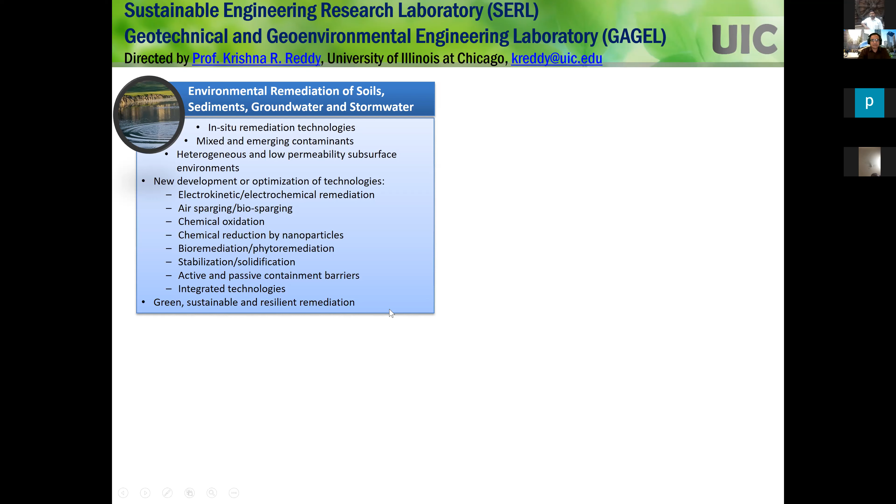And recently I've been working on green, sustainable, and resilient remediation. That's one of my major research areas. And the second research area is related to this short course: I work on waste management and landfill engineering.

So waste management deals with beneficial use of waste materials, even biological processes. And when you talk about landfills, as geotechs we contribute quite a bit, looking at the mechanical stability, contaminant transport, liner systems, and cover systems. And these days we are using a lot of biological concepts to make things sustainable, so we work on biocovers and bioreactor landfills.

So in this course, I'm giving brief lectures on broader topics. But if you are interested in knowing more about a lot of my research, then you can look into the papers that I have written.

The other area of research that I work on is called life cycle assessment and sustainable resilient engineering. Here we try to quantify the sustainability and then assess different sustainable materials and sustainable designs. This is really a very broad area that is applicable not only to geotechnical and geoenvironmental engineering, but any specialty in civil engineering, even chemical and mechanical engineering, or any branch of engineering. It's becoming very important these days to look at sustainability and resiliency — not just talking about it, but actually doing something and evaluating how well you are doing towards this sustainability and resiliency.

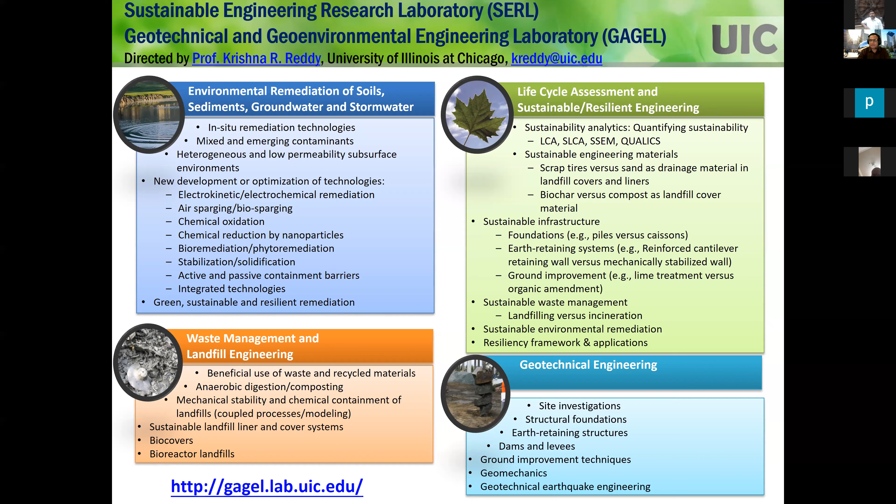So if you want to know specific research projects and specific publications, go to this website and you can find all the information that you need. So that's what I do for my research. It's pretty broad, but it is more on geoenvironmental engineering, sustainability, and resiliency.

So when I do research, I follow this research philosophy. First thing I do is identify the real world problem - what is that problem that needs to be resolved? Then we come up with a hypothesis of the solution that could be potentially feasible, and we test that hypothesis through bench scale testing. In our lab, we do small scale experiments, and if results are promising, then we scale up and do large scale testing right in the lab.

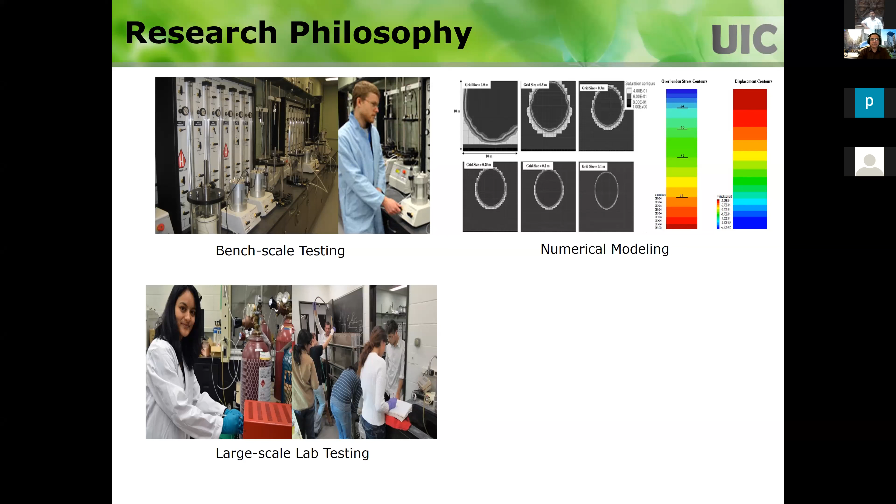And then if it works out good in large scale testing, we do mathematical modeling. So you understand all the different fundamental processes when you do the bench scale testing and large scale lab testing, and we incorporate those processes in mathematical modeling, and we model the real world situations. If you have to do that project on a large scale, how do you do that?

So we will model that mathematically, and then we actually design a typical field system, go to the field, and try to implement that, and see if it works as we modeled. So it's always important to start with fundamentals and then go systematically and evaluate that solution in a field scale scenario.

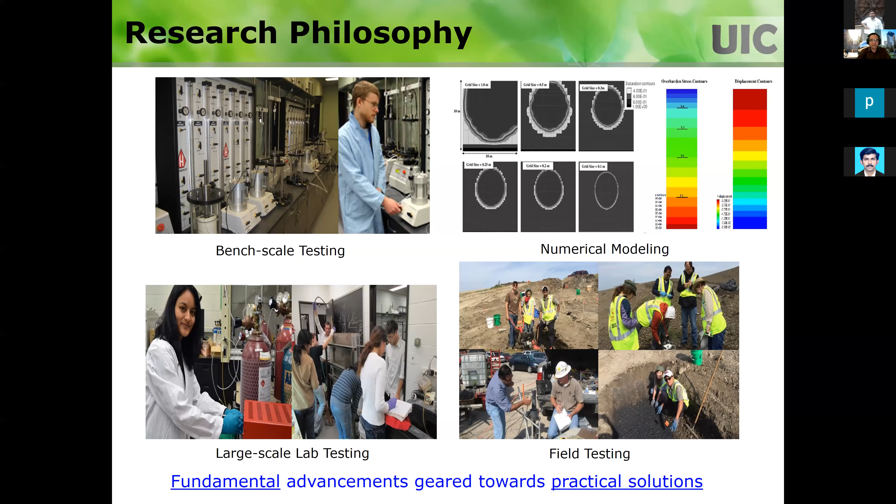So our research goal is, every project that we work on, we like to advance the fundamentals, but at the end we want to come up with a practical solution. We don't just want to look at fundamentals and write papers - of course we're going to publish papers, but we want practicing engineers to take our solutions and implement them and solve the real problem. That really makes us very happy, because we are able to contribute to solving the problems of this society and making a difference. That's the research approach we follow on projects that we work on.

I do a lot of lab scale testing. This is our lab, and this shows the facilities that we have. We have all kinds of soil and material testing, geochemical characterization testing, and depending upon the project, we develop bench scale testing. These are all in our lab, and the students actually use all these things.

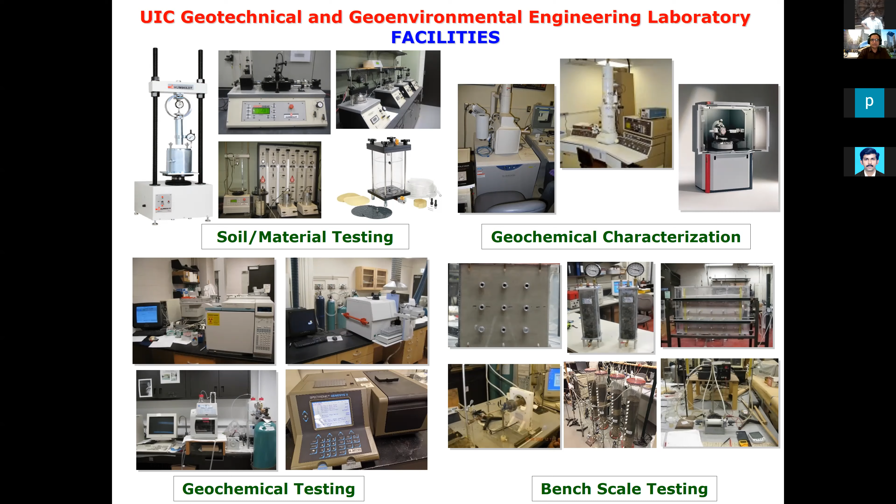So over 25 years of my career, I have had the pleasure of working with students from all over the world. In the US, we have people coming from different countries. When I go to the lab, I have international students in my lab. It's very nice to interact with these people and learn not only the research, but also the culture, and have a good time.

Not only working with these people, but every few years we get a different group of students. So you keep working with different students every few years.

So coming back to the presentation. My presentation is on end use of landfills. Here's how I'm going to organize it: first, I'll talk about waste dumps - how do we deal with them, what are the problems, and then how do we solve that problem through remediation. Once we remediate, how do we use those sites for beneficial reuse - the end use. I'll talk about that one in the beginning.

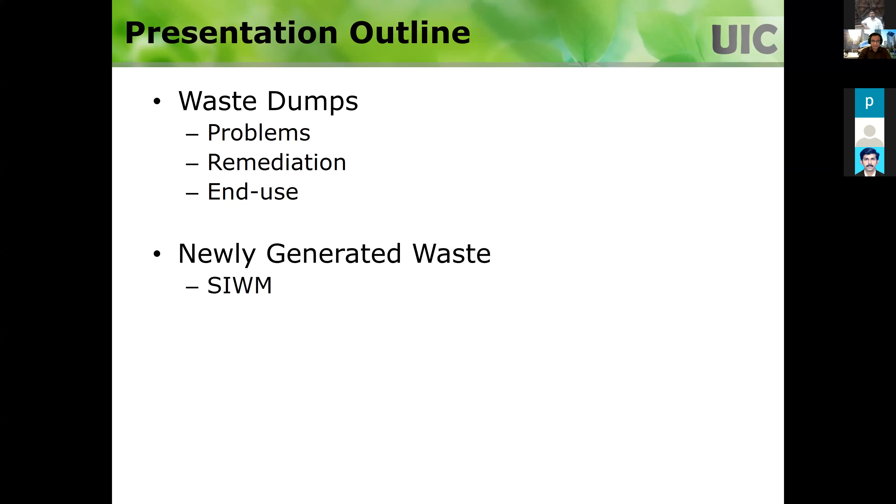Then I'm going to talk about newly generated waste. These waste dumps are for waste that was generated in the past, and that's how it was handled then. But now, newly generated waste needs to be handled properly, not dumped in waste dumps. So I'll introduce the concept of sustainable integrated waste management.

Then I'm going to talk about engineered landfills very briefly, how these days landfills are engineered. And once you have an engineered landfill and it gets closed, what can you use those sites for? That's what I'm going to cover. At the end, I'll have closing comments, and after that I'd love to answer any questions you have.

I want to put this caveat: since I'm in the US, I'm going to give a US perspective on all these things. Unfortunately I don't know much about what's going on in India - I have some background, but I can't be an authority to say what is correct. So I'll give you the US perspective, which is good because you need to know what is done in the US, and then you can see what lessons can be learned and how you can do things in India.

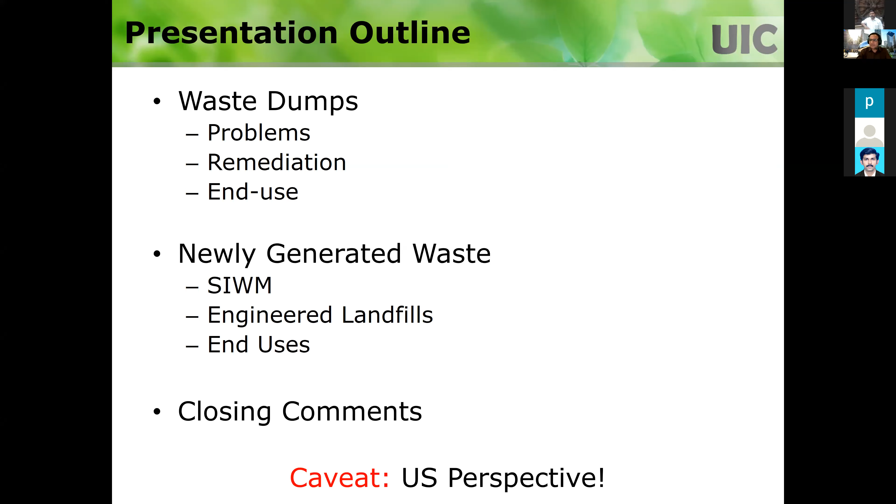That's my agenda for the presentation. So let's talk about open waste dumps. If you haven't seen a waste dump - if you're in a small city, you might have seen outskirts where people dump it, or the city designates a certain area for dumping - but you probably don't see the huge piles you see in big cities.

If you're working in this area, my advice is to go visit one of these sites. You can call up people, get some contacts, and say we're students, can you show us? It's eye-opening. You can read books and listen to presentations, but you can't get the feeling you get when you visit these sites. For a long time I didn't have any idea about these dump issues in India. One time I happened to visit one in Delhi - it's amazing. You really appreciate the problems when you talk about these waste dumps. So I highly recommend you go to one of these waste dumps.

I'm still trying to find out if you have MSW engineered landfills - if you have one like that, go see it too. To my knowledge, you mostly have open waste dumps. If you look at a waste dump, you can take a lot of pictures, and every picture looks amazing, but in a negative way unfortunately.

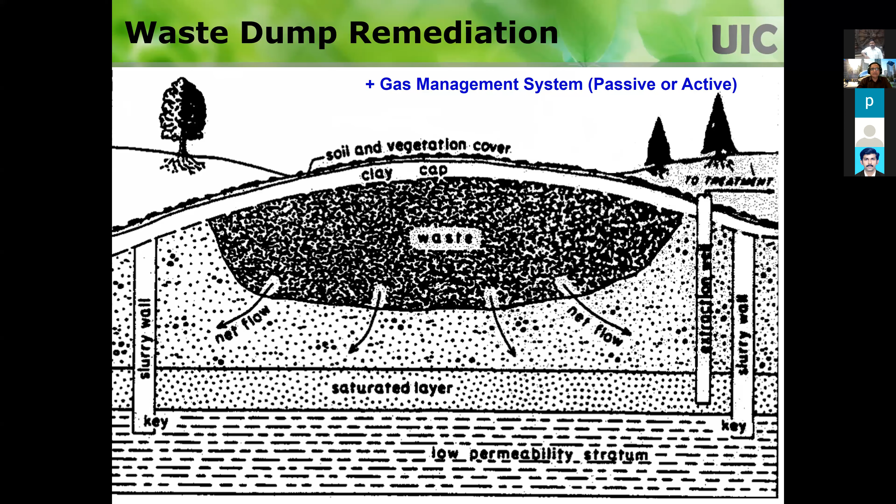So that's how these are cleaned up. Once you put vegetation on top of it, this can be converted into a park. Most of the time, the end use as a park is the cheapest option. Of course you need to grade the elevation and everything. This is one of the landfills close to my area, and people go there, and it's high.

From there you can get a good view. But there are other end uses possible, which I'll talk about later - even on closed dumps as well as engineered landfills after their closure. But this would be the simplest end use as a park. You have a soil cover and everything, so there's no exposure issue to people, so they can go there and enjoy the park. Since you have a mountain, the top view would be a prime spot to look at the surroundings, and people can go there.

On the other extreme is mining. Mining is basically digging it out and screening and separating these things. But mining is done only when organics are mostly degraded. If you have organics in there, generally it's not done. The other thing is the residue after organics is degraded - the residue should be clean.

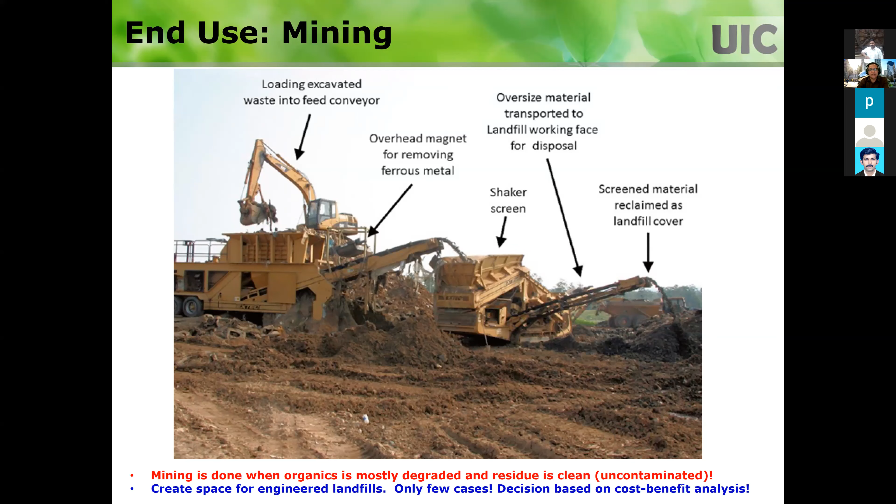Basically they dig out all the degraded waste from the old landfill and use the same space to build an engineered landfill. Now the question is about newly generated waste - that's the waste dump story from the US point of view. You learn lessons from that and see what can be done in India. We are creating waste every year, and the waste being generated is increasing because the population is increasing and so forth.

If you have existing dumps and you're not solving those existing dump problems, but you keep piling newly generated waste on top of them, when are you going to solve the problem? The waste dump problem is going to keep increasing. This is a tremendous amount of waste being generated, and as I understand, this waste is still going to the dumps. So if you're trying to clean up the dumps but keep adding to them, the problem is not going to go away. Think about it - it's not rocket science, just think about it in very practical terms.

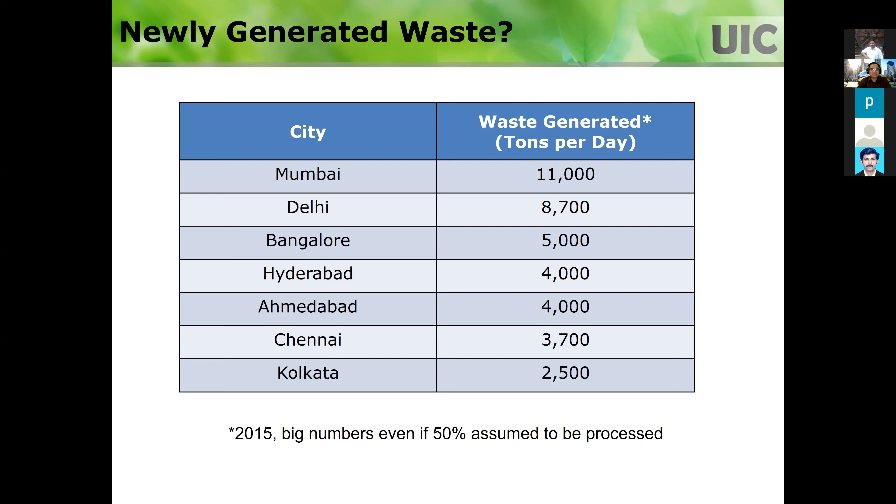If I'm generating so much waste per tons per day, like Delhi with 8,700, Mumbai let's say 10,000 per day, right? Even if you assume 50% processed out of this, so 5,000 tons per day. You can add that up every day. So per month, how much? Per year, how much? You still need to accommodate that waste somewhere. So if you don't have an engineered landfill, you are taking it to the dumps, and the dump situation is going to become worse and worse.

So young guys like you need to think rationally. All the stakeholders that work on these waste management issues should really come together and think about what is the long-term solution to this waste problem. We have waste dumps, and we are creating new waste every day. So we need a comprehensive solution to this problem. This is a very challenging and very important issue for researchers. If you're a student, master's or PhD student, if you can do something in this area, you are really helping people, helping the planet. So if you are passionate about environmental issues, this is the one that can really make you happy.

So the question is, what can be done, right? What is the big picture? What can we be doing with the newly generated waste? What is the rational way of doing it? So I want to show you this picture.

This is called integrated waste management. Remember, you've probably seen the waste management hierarchy, but the waste management hierarchy does not work in the real world. So this is called integrated waste management strategy, where you collect and sort it, then do material recycling, and some biological fraction you want to treat by composting or anaerobic digestion. Then whatever is possible, you treat thermally with energy recovery or without energy recovery. And things you cannot do anything with any of these other options, you can landfill. Now landfill here means engineered landfill, not the waste dump. And you can actually make that landfill an energy resource through landfill gas use.

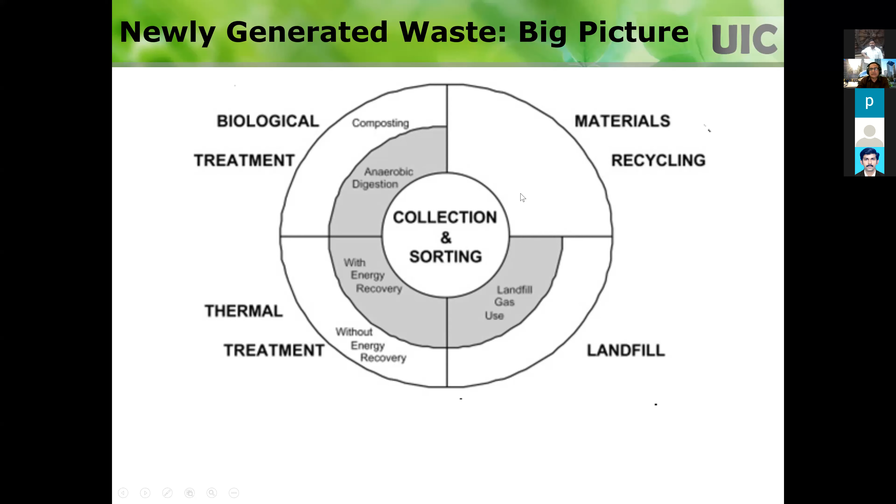What I'm trying to say is, a lot of times people argue that we're going to use thermal treatment and make the waste disappear. That's not going to happen, because there's a certain amount of waste that is not amenable to thermal treatment. Or you want to do biological treatment, but not all waste components are amenable to these biological treatments. Not everything could be recycled. So the idea of integrated waste management is that we need to use these combined options at the same time. Don't emphasize one more and another less—look at your situation and come up with a combination of these options: material recycling, biological treatment, thermal treatment if possible, and also landfill. You need to think about this framework of using all the options you have to benefit the situation at hand. This is called integrated waste management.

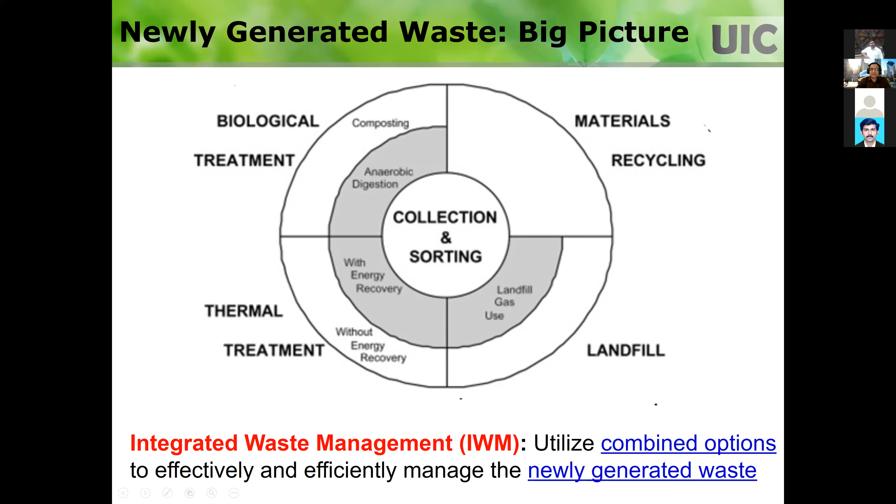Now, the question is, okay, I'm in a city. Obviously I cannot do 100% recycling. How much should I do biological treatment, how much thermal treatment, how much should I landfill? That really depends upon the sustainability factors. So you really look at that integrated waste management from a sustainability lens. This is what I mean by that.

What you have to look at is, this is the integrated waste management strategy in the middle, right, that's what I showed you before. Then how much of each option you have to use in a given situation really depends upon economics—what is economically feasible—and then environmentally, what is the best way to do it. Obviously you're trying to create a better environment, but if I have a thermal treatment and it has other secondary environmental negatives, then that's not good.

So you need to look at the broader environmental impacts, broader economic impacts, and then you need to also look at the societal issues, community issues. Obviously, you need to give them food first before you think about spending a lot of money on this integrated waste management. You need to really think about what their social requirements are, survival requirements are, and take care of the social needs first, and then in that context, figure out what can be done. So this is kind of a best framework that you can apply.

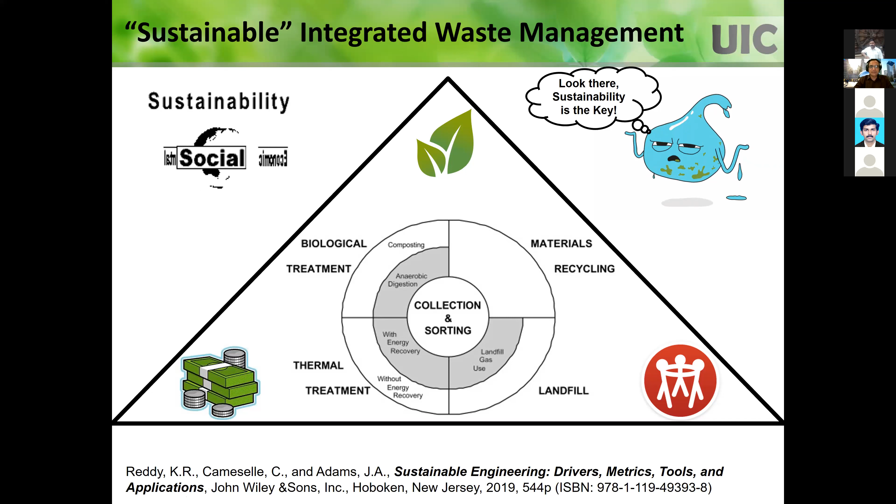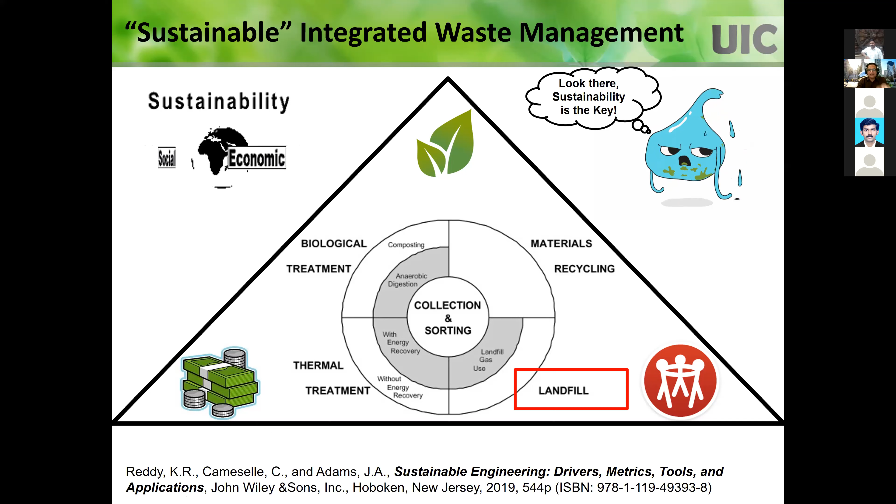This course, I could spend a lot of time on this one topic, but this course is focused on landfills - waste containment systems. Landfills are not rocket science anymore.

In the US we have regulations, and people follow the same kind of design everywhere in the world. You have a bottom liner, a side liner, a leachate collection system on top of it, then you pile up the waste, and then you have a final cover. We have well-established materials and design methods for liner systems, leachate collection systems, and the final cover system.

So people are doing it. In the US we have been doing it for over 30 years. We designed the landfills as per these established procedures, and they have been monitored and they are working good. So it's a proven concept, proven design and analysis methods.

So not only the bottom liner, leachate collection system, and final cover system - all these landfills will have leachate collection and treatment. That's the important issue, because the main problem with landfills is the leachate that needs to be addressed. And also landfill gas comes up. So what do you do with that? You collect it and treat it, or do something with it.

As I mentioned in my last lecture, there are many options for that. You can create energy out of it, which is good. So this landfill is not a waste thing - you're creating an energy source that you can really capture all the energy from.

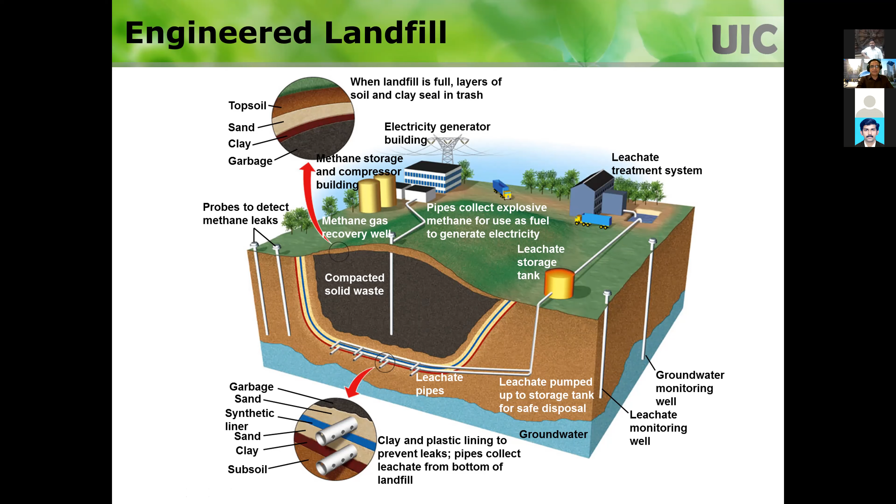So before it spreads too much, you want to address that problem, right? So that's the purpose of these monitoring wells, that guarantees that your design is working properly. So we do these things routinely in the US.

As I mentioned, there are a lot of resources that you can use to design these landfill components. So we wrote this book, and my co-author has over 40 years of practical experience. I also worked for 3 years in industry. So whatever is in this book is not hypothetical, it's all what is actually being done in practice. I know this book is expensive.

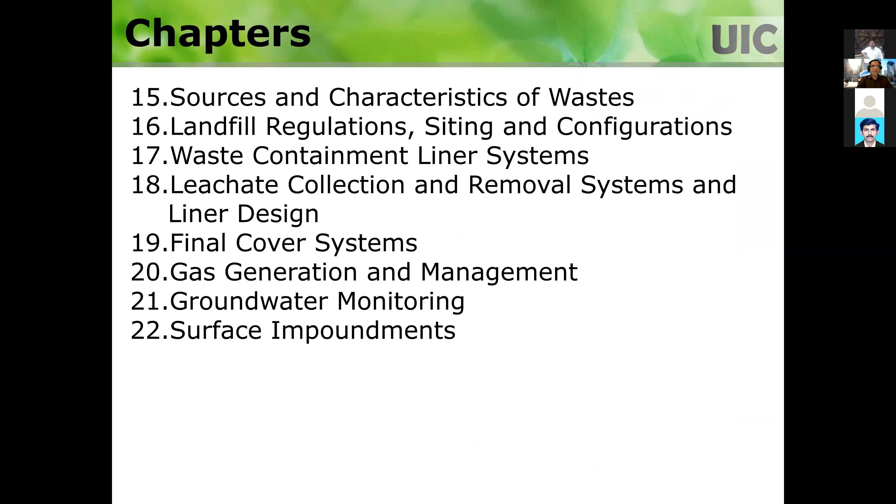We talked about this one a little bit before. Make sure that your library or somebody who can afford it can get it, and look at these chapters carefully. I like the way these chapters are written, because it's a logical sequence of topics.

When I took a landfill class as a graduate student, my professor came in on the first day and started talking about liners. I had no clue what we were talking about, because first of all, you need to know what are the sources and characteristics of the waste. Are you dealing with an MSW landfill or a hazardous waste landfill? What are the regulations? How do you look at the site? What are the liner systems?

So you need to build gradually. Even within each one, when I say liner systems, you need to think about where do you start. I'm not going to start about something without considering what is the logical way to begin working on these things. So that's the idea of writing this book: to give a new reader, a new engineer, or students a sequential set of topics, and at the end you end up with an engineered landfill that works.

There are waste companies, and the landfills are owned by private people. They make money because whenever waste comes to the landfill, the sender has to pay. Most of the waste is handled by city governments. For example, I live in a place called Naperville, and Naperville taxes me every year a certain amount for waste. Every week they collect the waste from me, and then they send it to the landfill, and they pay the landfill. So the landfills are owned by private people, and they make money by charging people who bring waste to their landfill, per ton, whatever they charge.

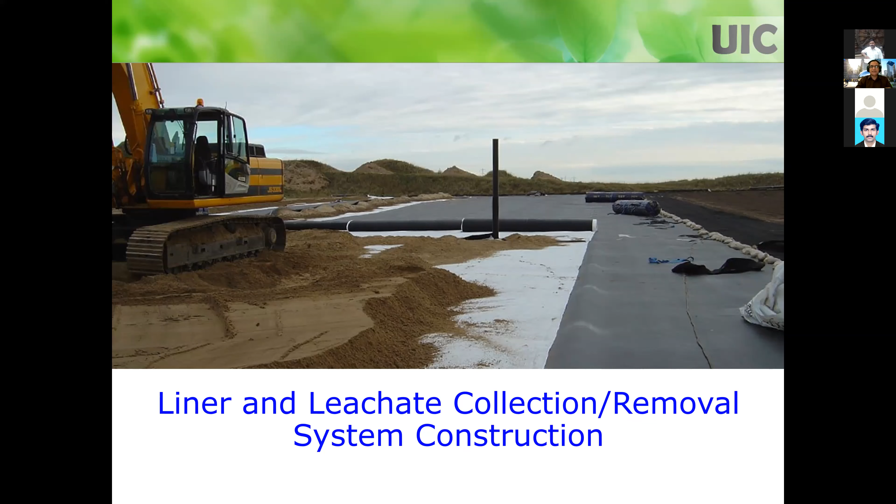I've been to many landfills. As I mentioned, you really need to go to a landfill. When I teach a landfill design class at my university, I make sure we take students to the landfill, and have the landfill operator give a tour of the whole site, so they can put what they learned in class into context when they see everything.

So you place everyday waste and compact it with these compactors, and every day you cannot walk away without putting a daily cover. The next day you come, and if it's a removable daily cover, you can remove it, put the waste, compact it, and that keeps on going. At the end, you put the final cover construction, and then what is the end use?

This lecture is on end use, and this is the end use of one landfill after closure. It's converted into a golf course. It's not too far from my place, and they're making money because all the rich guys come to play golf and pay a lot of money, so it's a revenue source. It's not just that, it also aesthetically looks great. You can see that.

And remember, the landfill requirement says that after you close it, after you put the cover and the vegetation, you need to monitor for 30 years. What are you monitoring?

You're monitoring the leachate, gas, and the groundwater. That has to be done for 30 years. During landfill operations, money is taken out from the landfill owner and put in the bank, and that money is used every year to monitor the landfill. So if there is any issue, they need to get into detection and corrective action mode. This is what goes on - you're using it, and at the same time you're monitoring it.

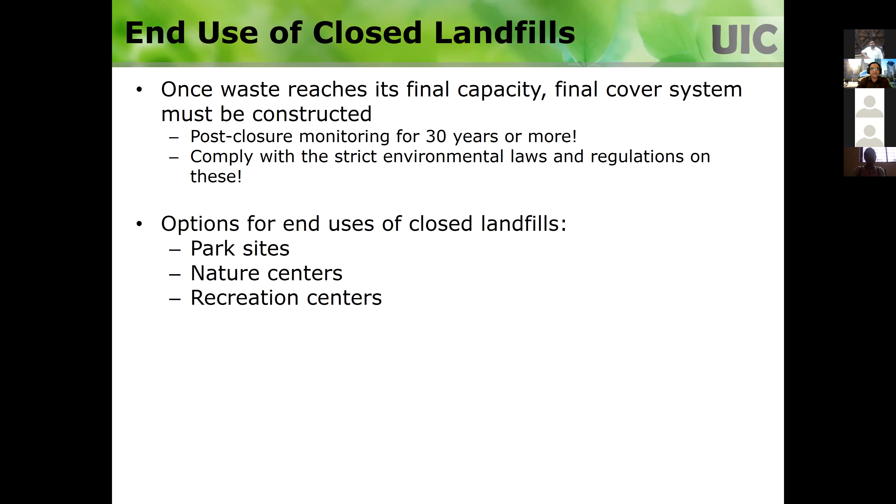And then that site can be used for different purposes - park sites is one common thing, and nature centers, recreational centers, golf courses, commercial buildings. So you can use it for a lot of these different end uses.

Unfortunately, what happens is people don't think about this end use in the beginning of the landfill project. They think about it after the landfill has been in operation for many years, or when it is closed. By that time you have less flexibility - you've already decided what the geometry is going to be, the final cover. If you knew in the beginning, you could have changed certain things; it would have made it much easier.

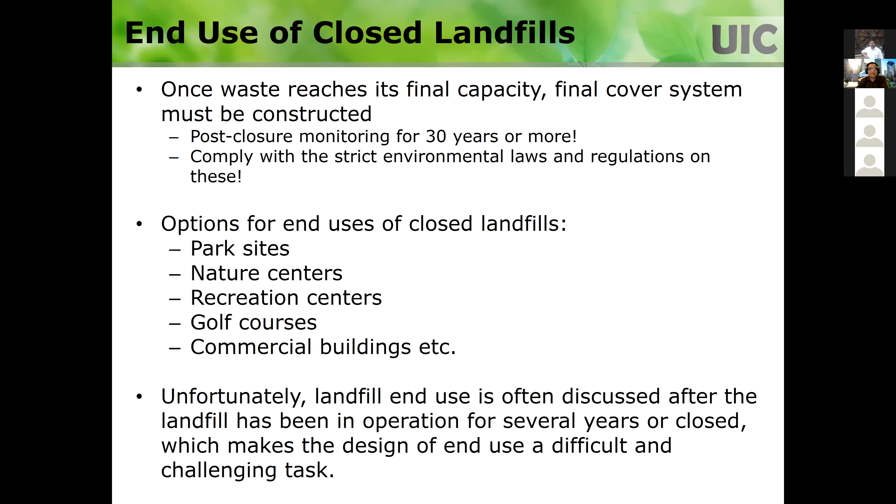So the end use is important. You just don't want to walk away from the site and leave that large area of land useless, right? You want to use that area for some beneficial purpose, and end use consideration improves the aesthetics of that location.

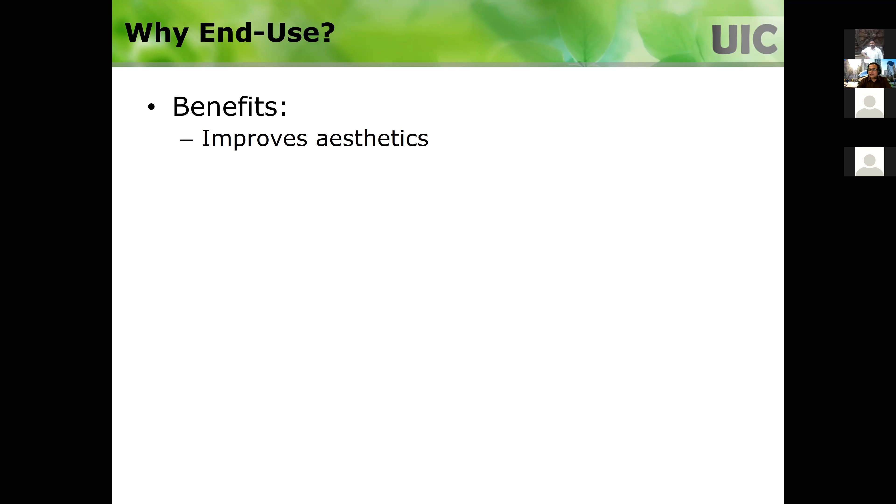Here in the US, you go to a closed landfill and you don't even think it is a landfill. There's no smell. Somebody has to tell you, or you will see these monitoring wells around, and then you'll realize it may be a landfill - but otherwise, they are very nice locations. Nice sites, they look pretty nice.

Especially if a site is in an urban location - in urban areas land is scarce - so using it even as a park in the middle of all this built-up area is really nice. That's what I'm saying.

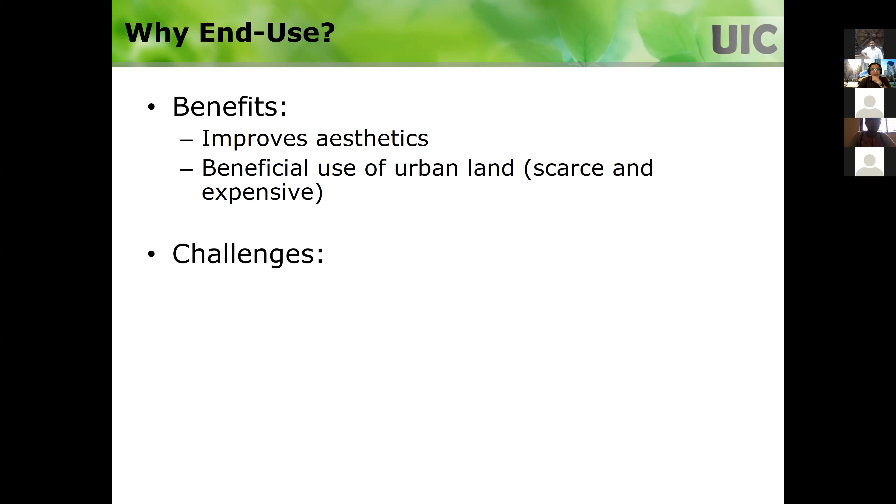So those are the benefits, but there are a lot of challenges. You're trying to build on top of the waste, right? Think about it - building on top of soft clay is a problem. So the problem with building on top of a landfill is you're going to have substantial settlement, also non-uniform settlement. That's going to be a big problem.

The waste is degrading slowly, so you're going to have a landfill gas emission problem that we have to worry about. And the leachate outflow needs to be addressed. These are the big problems that you don't see in typical infrastructure development projects.

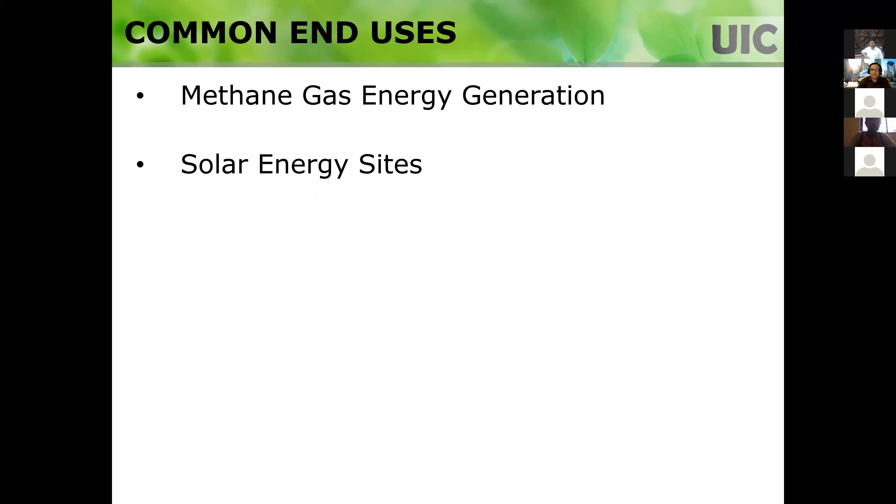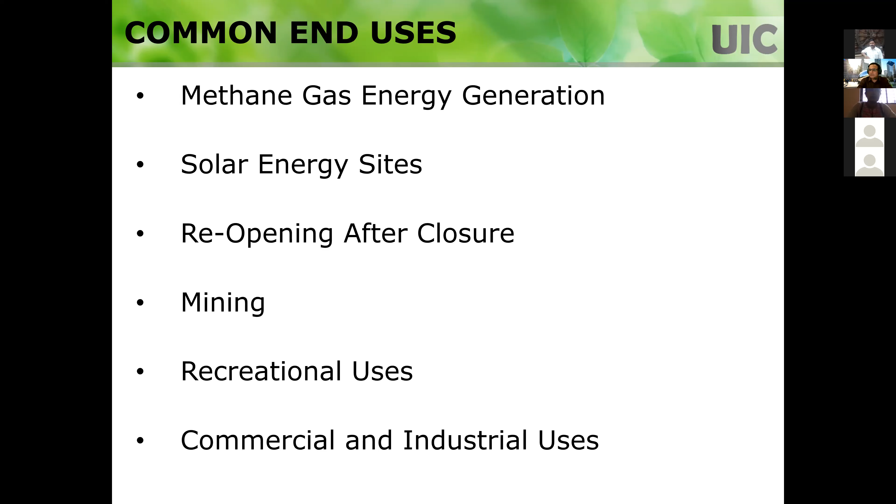But still, landfill sites after closing are used for different purposes. The common purposes are: methane gas energy generation, solar energy sites, reopening after closure, mining, recreational uses, and commercial and industrial uses. These are all the different uses that have actually been practiced in the US. So what I'm going to do is quickly give an overview of each of these things.

Methane gas energy generation - as I mentioned, as the waste degrades in the landfill, you're going to have 50% methane in that landfill gas, so that has a lot of value. Its heating value is 500 BTU, half of natural gas - not bad. Landfill operators can sell that gas or use it for energy recovery.

What you do is collect the gas from the landfill - you have to put those gas collection wells anyway. Then you basically pump all that methane through the gas scrubber, then the gas compressor, then finally the engine generator to generate energy. This is also promoted by the US EPA because methane emissions from landfills are a huge greenhouse gas contributor.

Methane is 28 times more potent than CO2 in terms of global warming, so anything you can do to capture it is good. The US EPA has a program to reduce methane emissions and encourages these kinds of projects, because now you're not emitting to the atmosphere, and you're using the energy, so equivalent fossil fuel burning is avoided. You have double benefits on this one.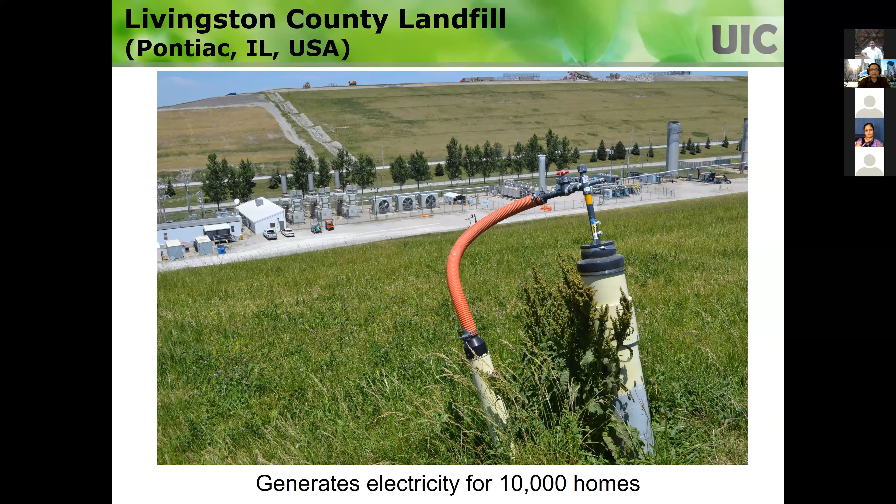This project will continue until the gas is completely exhausted. Then this landfill site can be used as a solar energy site. It's a huge open area, so if you put solar panels on those areas, you're creating a lot of solar energy.

For example, this is the US map. Everywhere across the US, you have solar energy potential. Red means more sunlight, so more energy. I'm in Chicago, right around here, we're more in the green. Not as much as the western part of the country, but no matter where you are, you have the potential to generate solar energy.

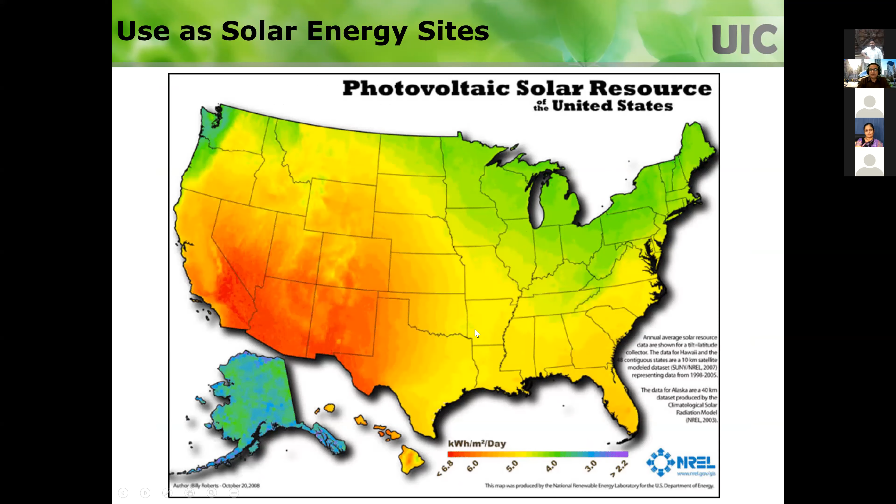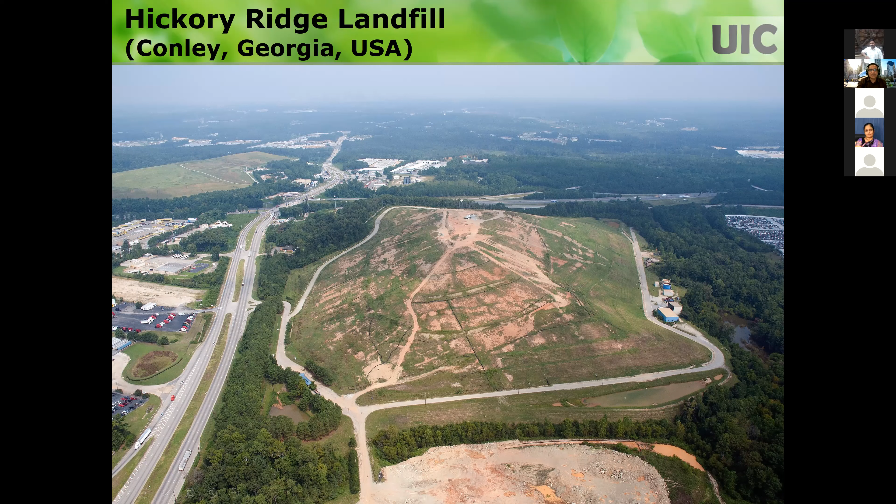This is the landfill at a place called Conley, Georgia. This landfill is closed, they put a final cover on top once it reached capacity. So what is the beneficial end use? They put solar panels on top of it. They also used a unique cover system called the exposed geomembrane solar cover, with about 7,000 solar panels placed on it. Think about it, it's open with no obstructions, so you get maximum efficiency out of these things, which is excellent.

So you can do those kinds of things anywhere you want. The other end use is reopening after closure. This isn't really an end use, but it happens sometimes. You close the landfill, but then you create new waste and don't have anywhere else to dispose of it. What do you do if you can't find a new landfill location?

If you don't have any other option, a good option is to expand the existing landfill. This is called vertical expansion, where you put new waste on top of the existing landfill. You use this when you don't have much area, and you only own this land within the property boundary. The only way you can expand is going up, not laterally, so that's what is done.

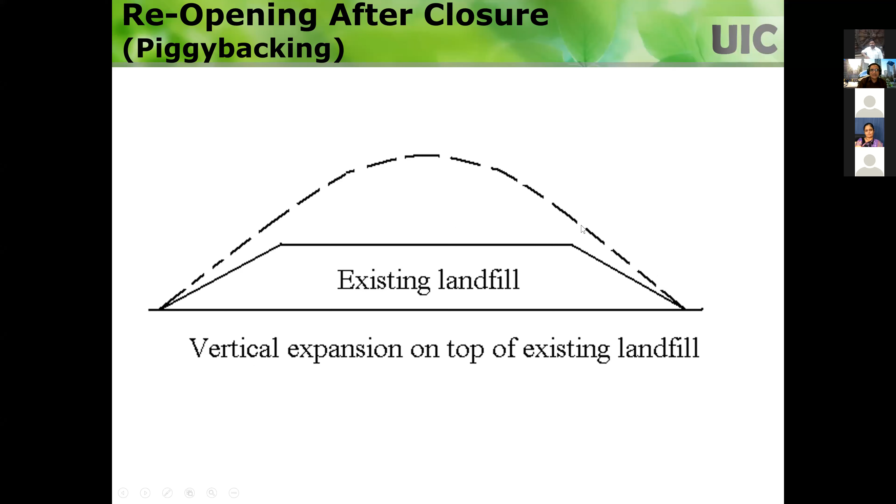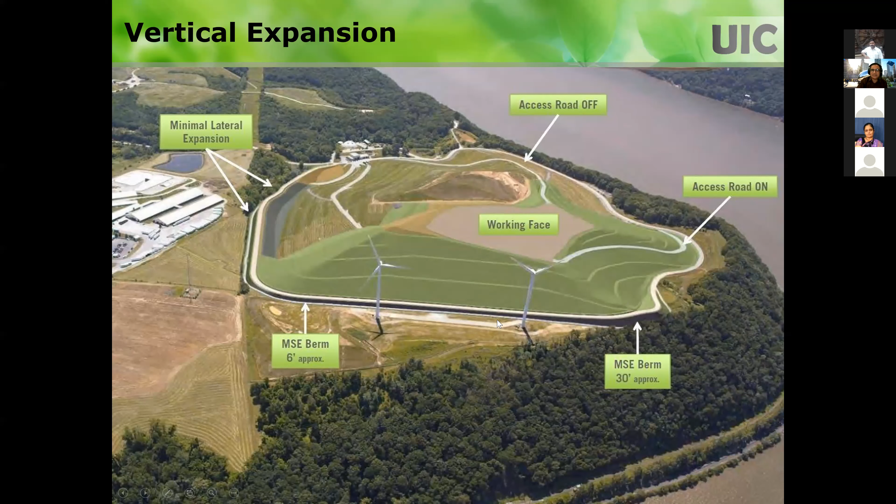This makes it challenging because at the edges, the original landfill had stable slopes, but now if you want to increase the height, you need retaining systems around it, otherwise it's not going to be stable at that steep slope. So now there are a lot of reinforced retaining wall systems, because if you don't have a retaining wall system, you just have a perimeter berm, which occupies so much more space.

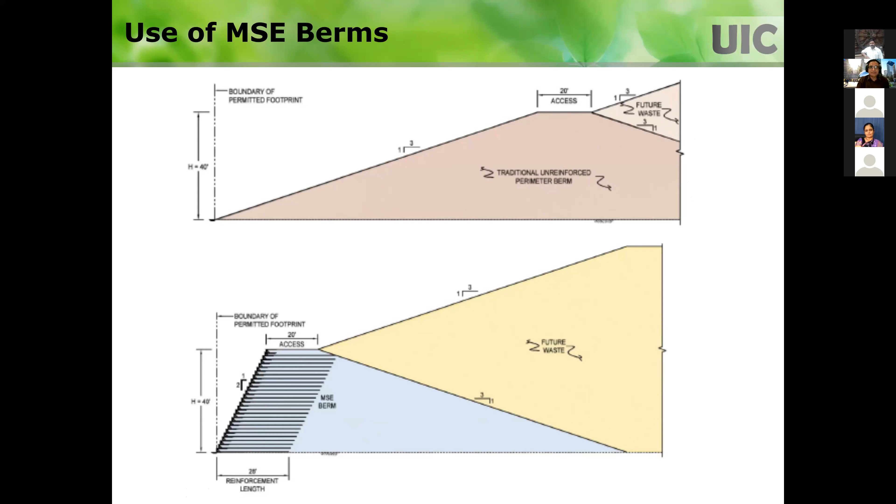This is the boundary; you cannot go across that one. When you put a conventional earthen berm, you occupy so much space, and you lose the space for the waste. Whereas if you put a reinforced retaining wall, the space occupied by the retaining wall and reinforced backfill is here, and then behind that you can have a large area. You can compare the two: you have more space for more waste to be disposed. So in a lot of these cases, reinforced retaining walls are becoming common.

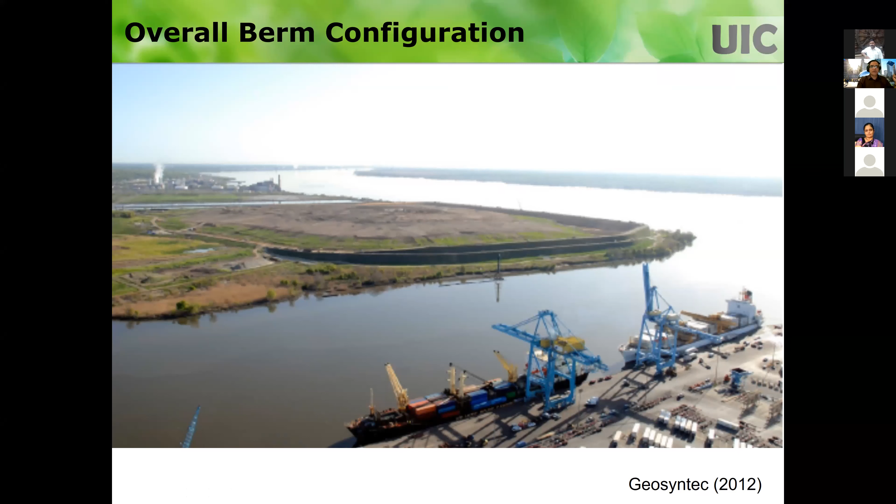In the back of that, you need to put the membrane and then expand on top of the landfill. So these projects are being done. This is where the area is limited and you can only go up. But in some cases, you may have area available right next to the existing landfill. This is called lateral expansion, so you can expand laterally.

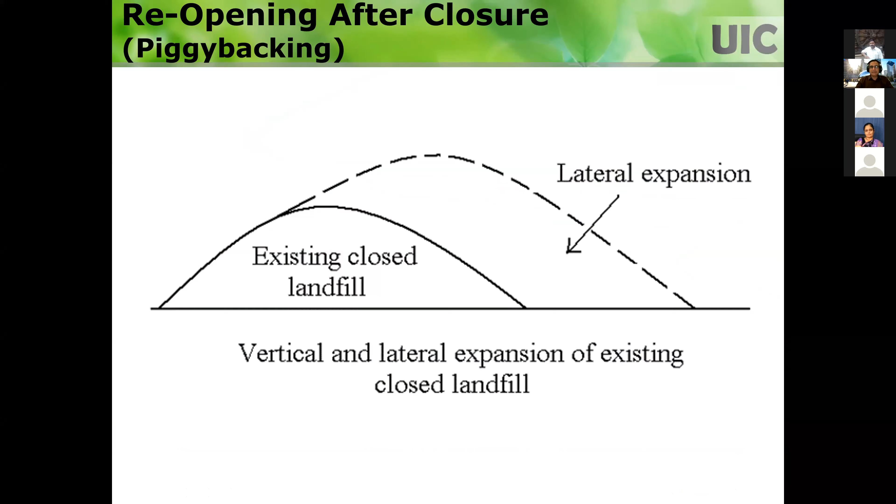This is how it is done. For example, this is the landfill location, and there's nothing around that area, so we could basically have a new cell right next to the existing one. This is the existing landfill, and you can have a lateral expansion right next to it. So it was closed, but now you realize you need to accommodate more waste. This is the lateral expansion you can do - put the liner systems and everything, and then make it a bigger landfill.

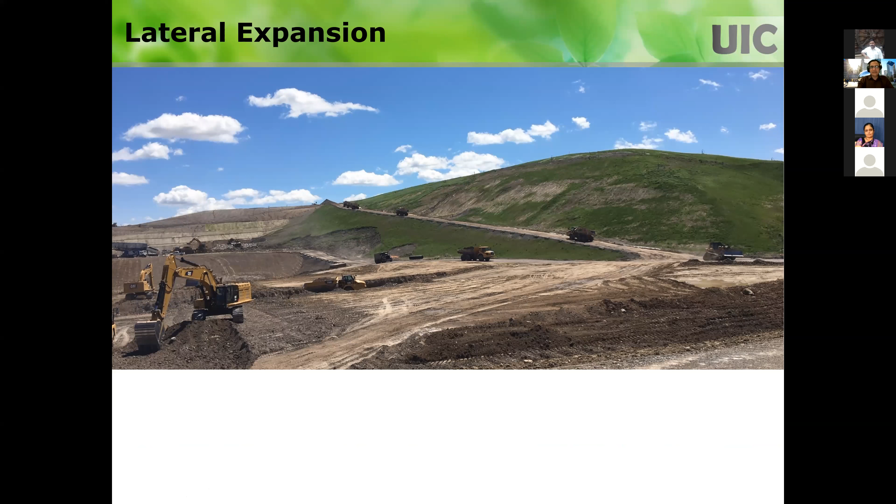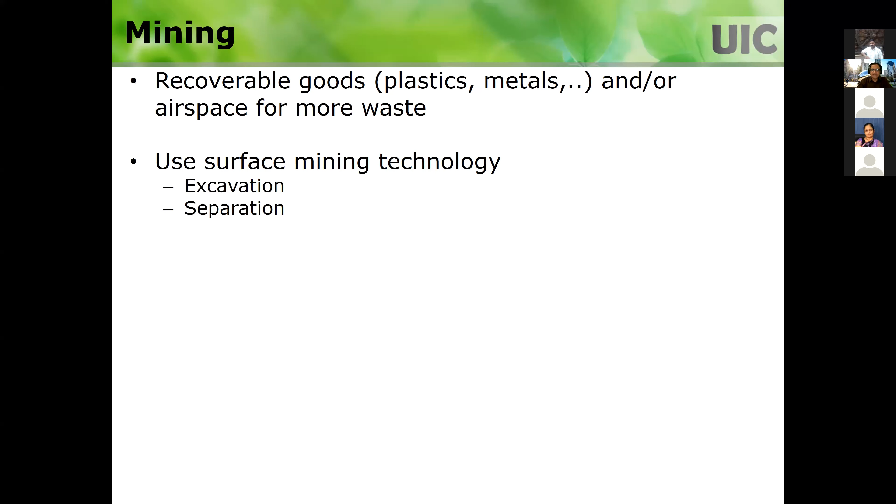The other option is mining. Mining is basically done to recover the goods, and also, as I mentioned before, mainly in the US, it's done to create more airspace for putting more waste. So if you're running out of space and cannot do vertical or lateral expansion, what is the best way to do it? Take out the waste, mine it, and create more space to put more waste in the same landfill. You use surface mining technologies, excavation and separation.

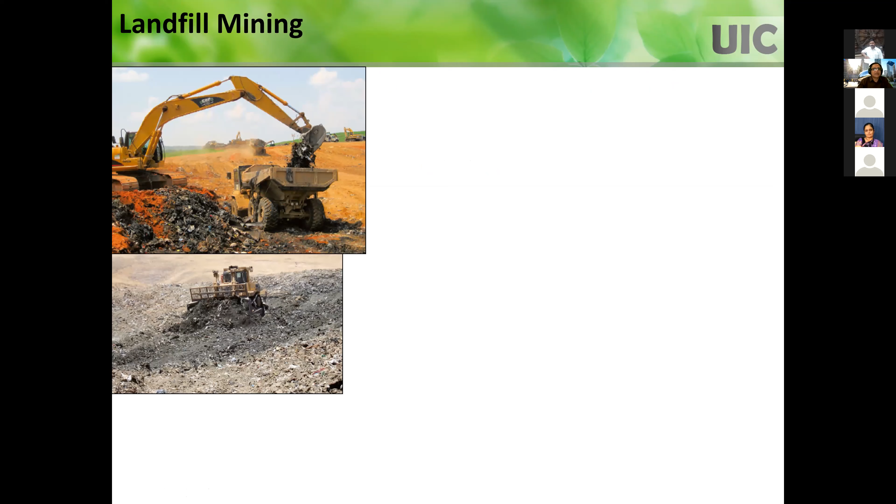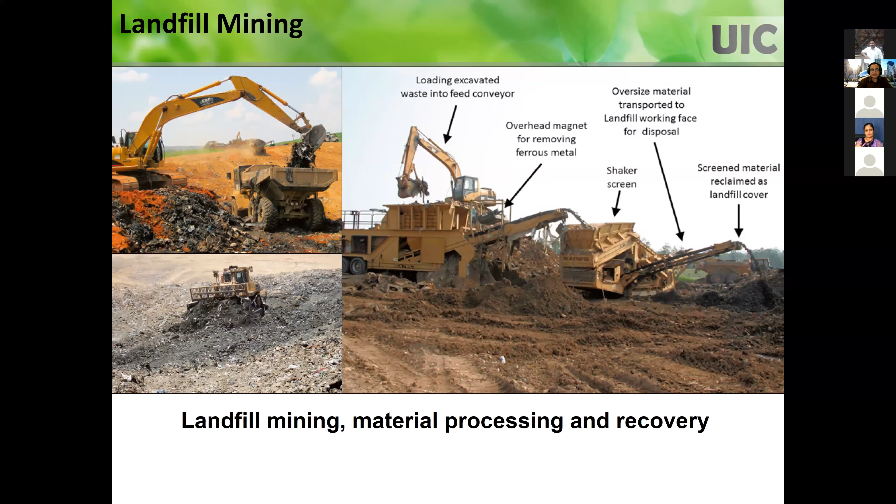There are different steps: you split them, do metal separation, then screens, then wind sifting, and basically separate the metals and oversized particles, heavy materials, light materials, and fines. So you excavate the waste and transport it - here is the excavation feeding into the conveyor, and you have magnets that take out the iron. Here are the shakers, and you shake it to separate the oversized versus finer fraction from the waste. That's what is done.

As an example, this is a landfill in the US where they tried to do Phase 1, just to see how this whole thing works out. Phase 2 was supposed to start in 2019-2020; I don't know the status of that. The idea of this mining at this site is there was an old dump without any liner. This is a huge landfill, and there's a portion that was not lined, and they wanted to prevent groundwater contamination and greenhouse gas emissions from there.

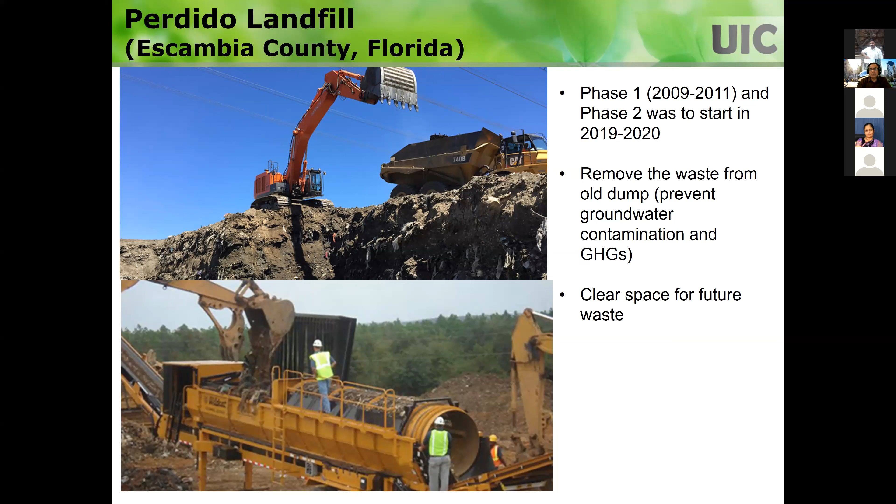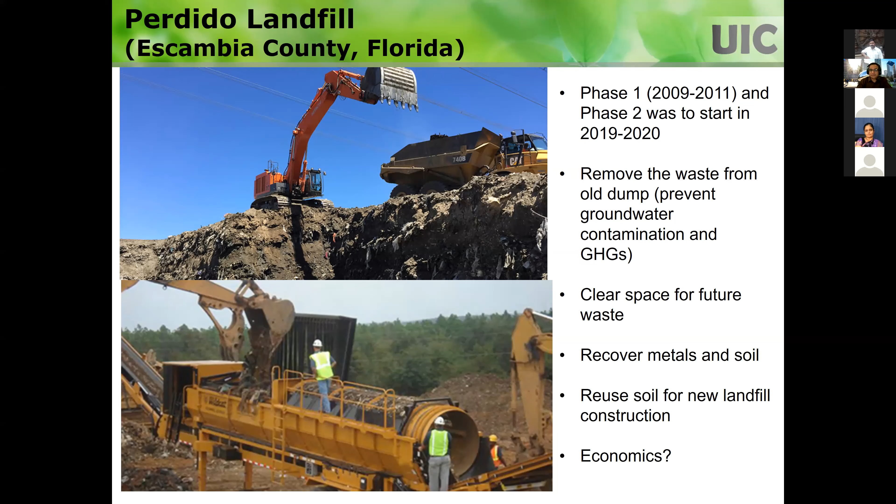So they wanted to also create more space. They wanted to mine that old landfill dump site area, recover the materials, create the space, and then use the soil for new landfill construction at the same location. Economically, it's expensive, but they didn't have an option because how do you clean up the contamination at the site? It's a constant source emitting greenhouse gases, so to control the environmental pollution, they had to do this mining.

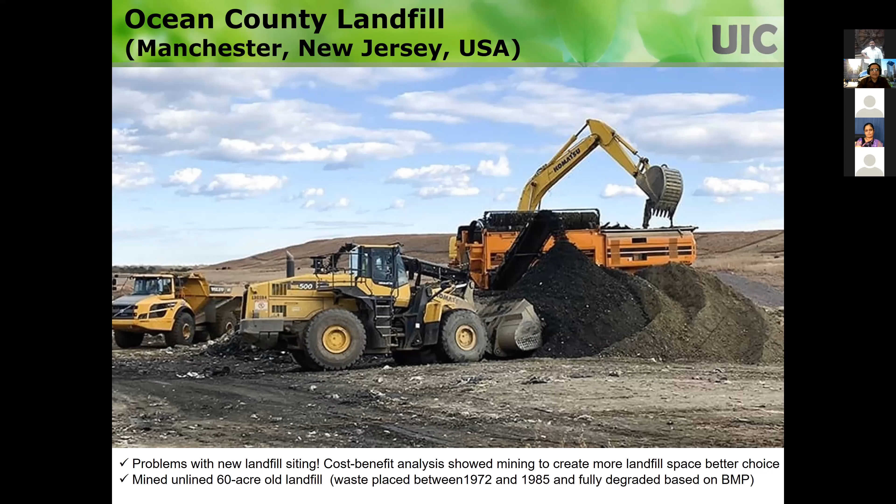Here you're mining it to create more landfill space to accommodate more waste. This is an unlined, old landfill - the waste is in there, and it's degraded. You're reusing the same location. There's another project in the US - this is a research pilot study, and they did some investigation.

They found out that doing the mining is not economically feasible compared to the other options they have, so they abandoned the project. They terminated it after the initial investigation.

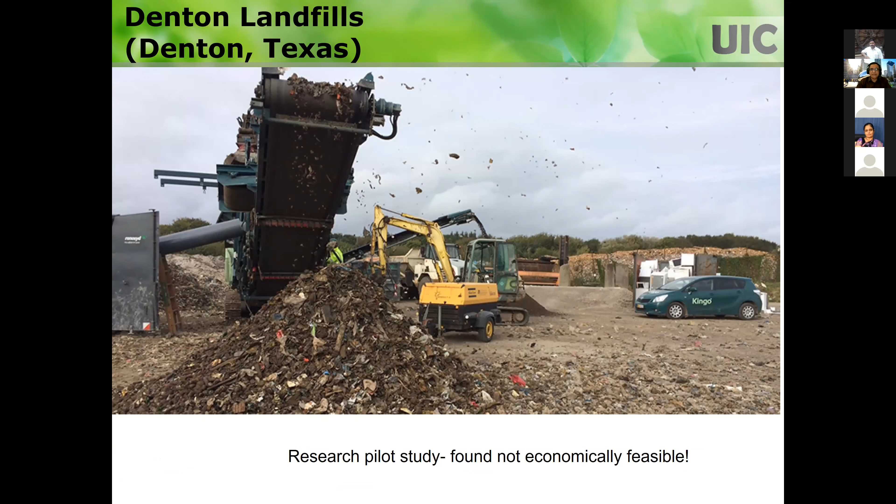Recreational uses are very common: golf courses, nature and recreational parks, animal refuges, tennis courts, sliding hills, ski runs. This is one landfill in Florida—you can see the entire landfill has hiking trails, baseball stadiums, and basketball courts. This is a place people want to visit often, and some people may not even realize it's a landfill.

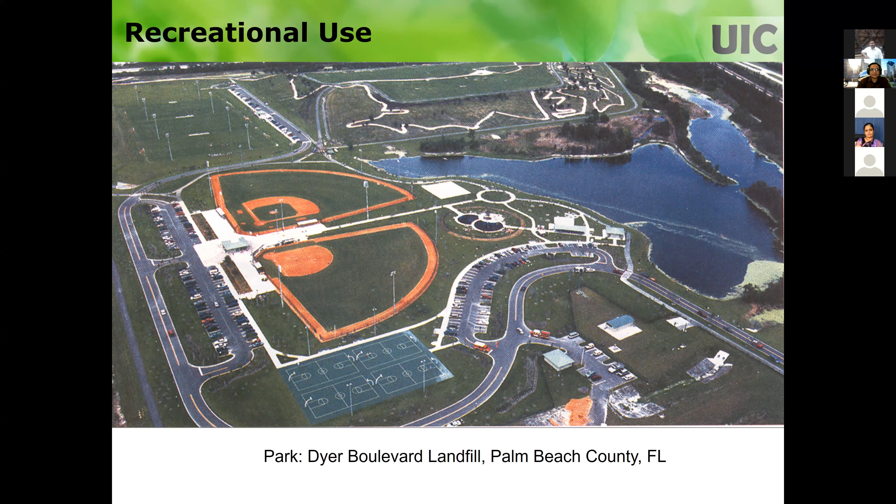When thinking about these recreational uses, capping is important—erosion, infiltration, and landscaping aspects. You need to think about what kind of trees and vegetation can grow on the landfill cover, and about settlement, which keeps happening. You'll do maintenance, but you don't want to put anything permanent—use non-permanent, flexible materials, with ongoing maintenance.

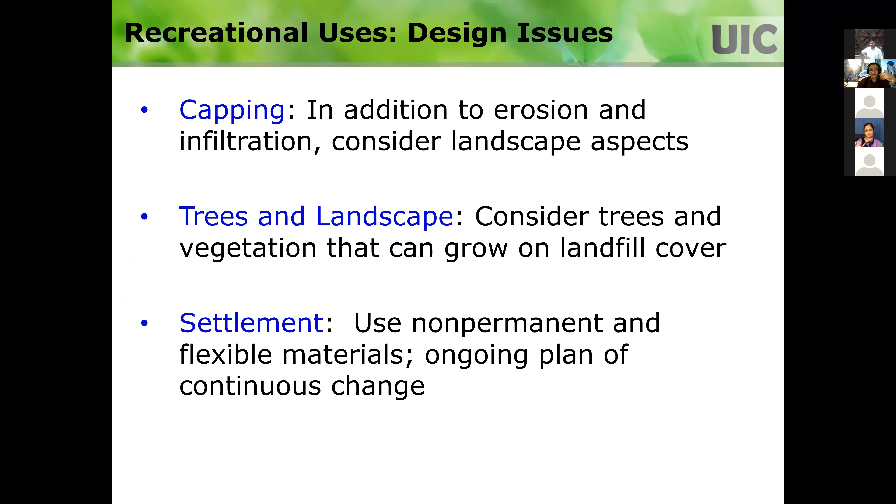The last category is commercial and industrial uses on top of landfills. In the old days, landfill locations were outside the cities; now they are within the city center. So those become ideal locations for retail stores, warehouses, office buildings, and manufacturing facilities, using the land for buildings, roads, and parking lots.

Here's one landfill where they built a building—a Home Depot, which sells all the materials needed for constructing homes. What did they do? It's an unlined landfill with no liner at the bottom, so they used pile foundations to support the structure. The piles go all the way through the waste and into the subsurface soil, and they have an active gas control system in this one.

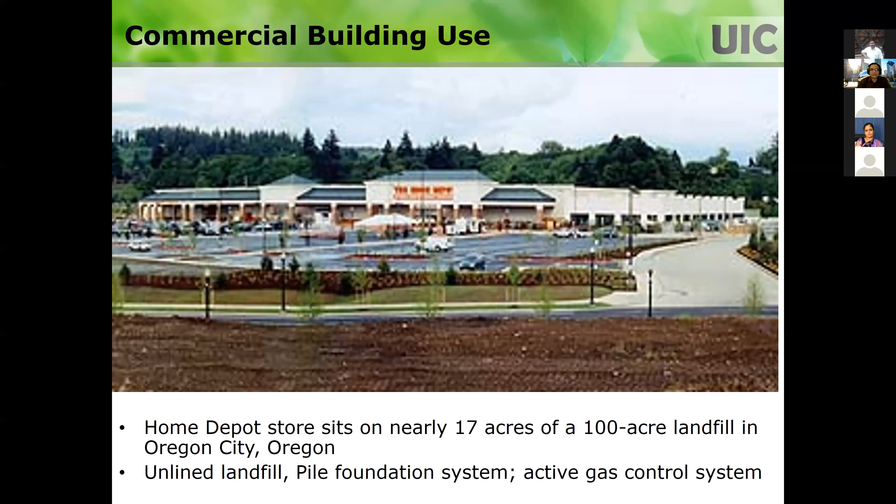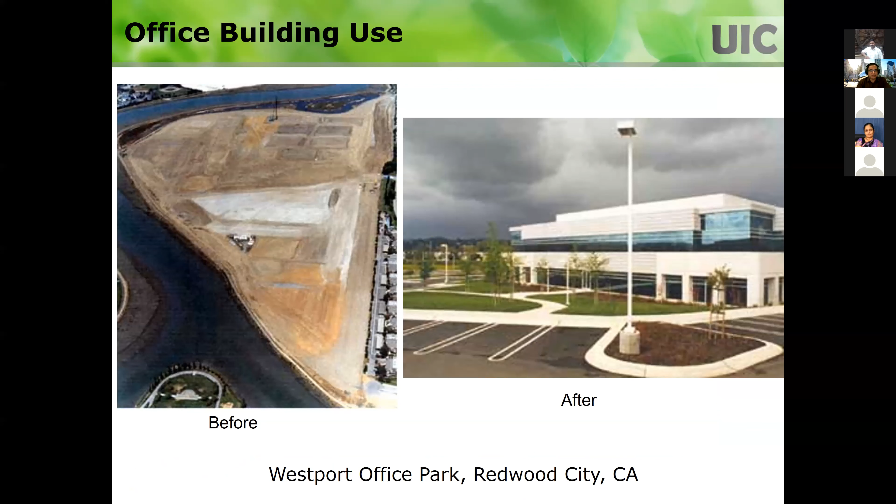Here's another location—a landfill converted into an office building. So this is the situation.

You need to think about the challenges in designing these things. Designing a building on problematic soils is already complicated, but designing on top of a landfill is even more so. Still, nothing is impossible for engineers—engineers are there to create solutions.

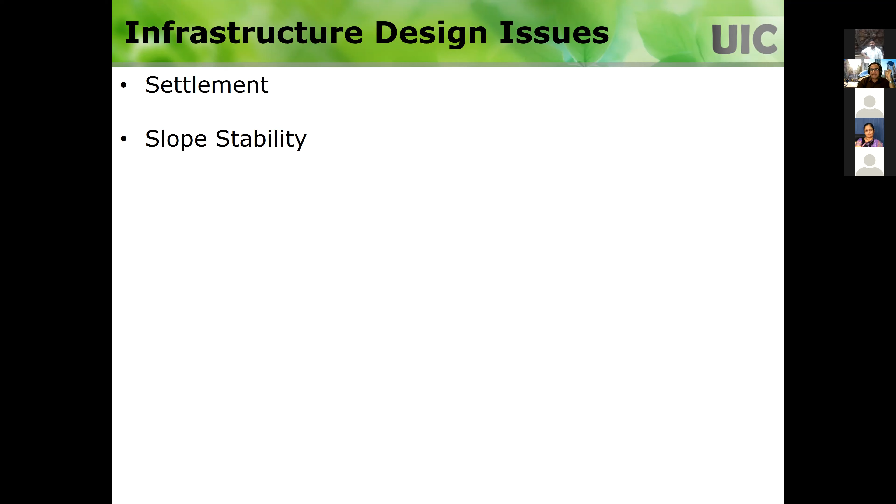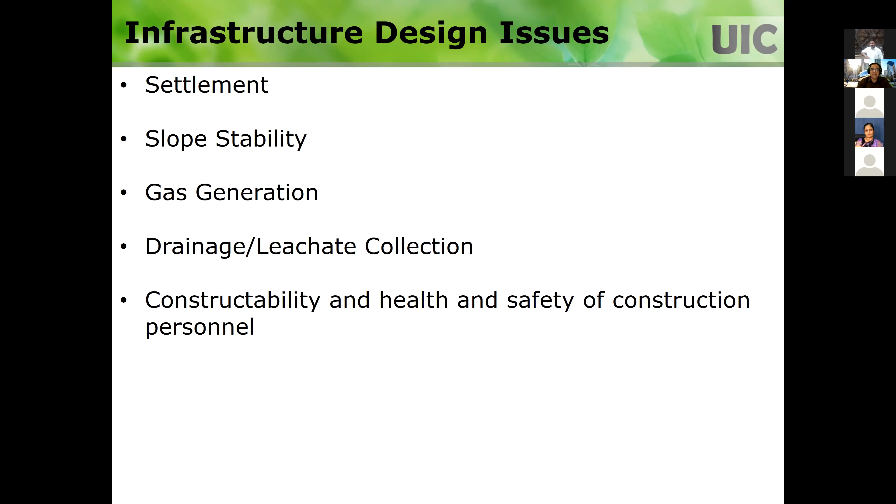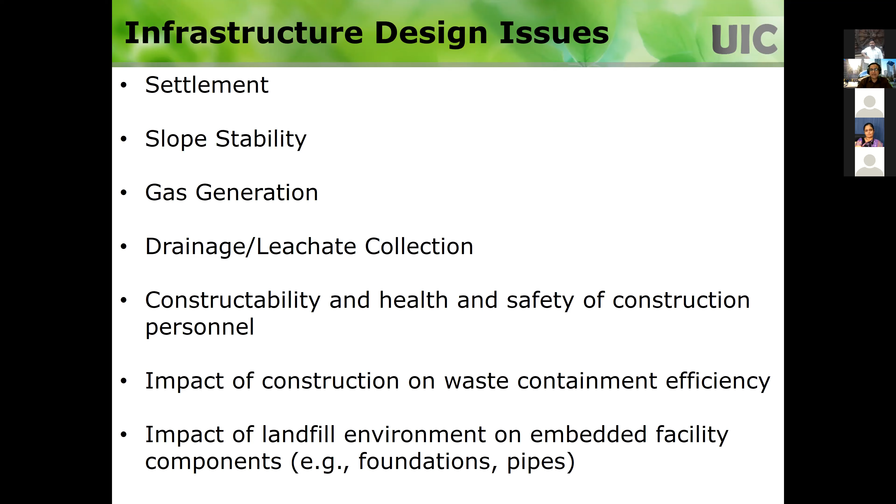We need to consider settlement, slope stability, gas generation, leachate collection, and drainage. Settlement and slope stability are always considered, but gas generation and leachate collection never come up in typical cases. Also, constructability and health and safety for construction personnel matter—you're working in the landfill during construction, so you have to be careful. You also need to think about how construction affects the containment facility, since you don't want to compromise containment efficiency, and how the landfill environment affects infrastructure components—for example, pipes and pile foundations placed in the waste versus in soil.

Settlement is a big issue. Like in conventional geotechnical engineering, we use surcharging, dynamic compaction, and grouting—those can also be done here, with dynamic compaction being common. But another option is leachate recirculation or a bioreactor landfill.

Basically, with a landfill, this can only be done in a lined, engineered landfill—you need a liner system and a leachate collection system. Without that, you cannot have a bioreactor landfill. It's called a bioreactor landfill or leachate recirculation landfill; if you're just circulating the leachate, that's called leachate recirculation.

Bioreactor landfill is a broader term implying not only leachate, but other kinds of fluids and amendments could be injected. You take out the leachate and then inject it back into the waste, through vertical wells or horizontal trenches, basically increasing the moisture content.

The problem with engineered landfills these days in the US is that you put the cover on top and take the leachate from the bottom, so the waste tends to be dry. Under dry conditions, it does not degrade well. So the whole idea is to recirculate the leachate so the waste moisture content can be higher, and then the waste can degrade really fast.

So there are a lot of benefits, primary and secondary. The waste degradation happens really fast, you can get a lot of gas right away, waste-to-energy projects become possible, and settlements happen really fast. Ultimately you're trying to achieve waste stabilization quicker.

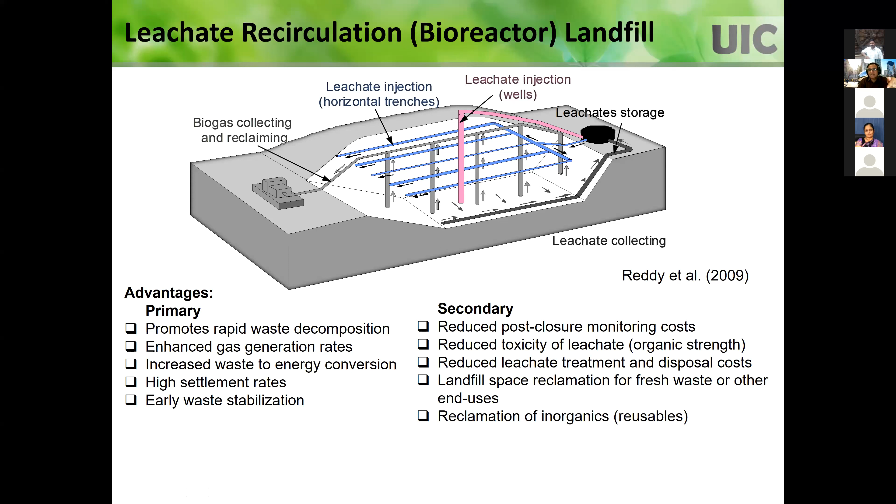The secondary benefits are that since you're recirculating the leachate, you're not spending money on leachate treatment, and since you're stabilizing quickly, you reduce post-closure costs. Once the waste degrades faster and settles, it's easier to construct anything on top of it, so end use becomes a lot easier.

This is like an in situ bioreactor system, an anaerobic bioreactor. If you're familiar with biotreatment systems in environmental engineering, this is like a huge anaerobic bioreactor, an in-ground bioreactor.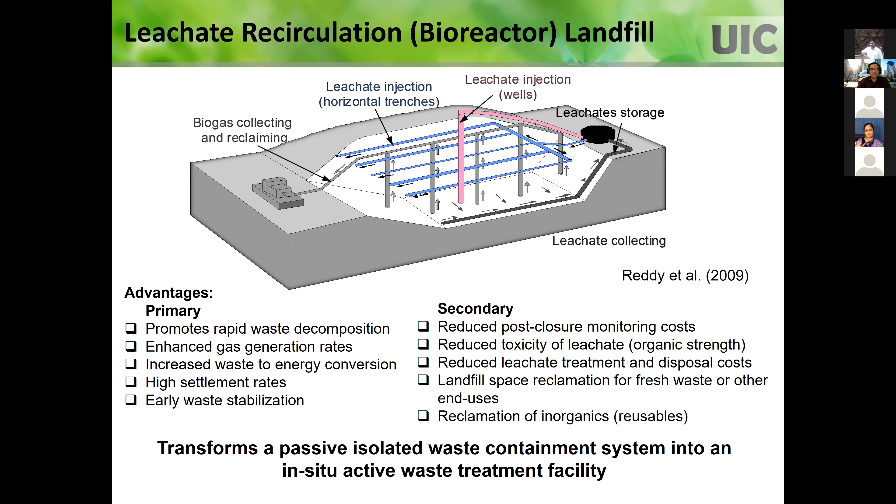We've been working on these bioreactor landfills for a long time, maybe for the last 20 years. I was looking at my publications, and I have more than 30 publications on this topic. One of them is in IGC, the Indian Geotechnical Conference in 2006, so that's about 15 years ago I was talking about this.

We did a lot of lab testing. This example is from that paper; I didn't include all the papers, just selected a few. We also did a lot of field investigations, like geophysical testing and other things. I really want you to go look, all these publications are available on my website, and you're more than welcome to look at them.

We also did modeling and created design charts, because you want your research to be used by practitioners. Recently we developed a very comprehensive coupled thermo-hydro-biomechanical model to predict how the landfill, the bioreactor landfill, will perform. That would be the state of the art modeling paper, so you can look at it if you're interested in working in this area.

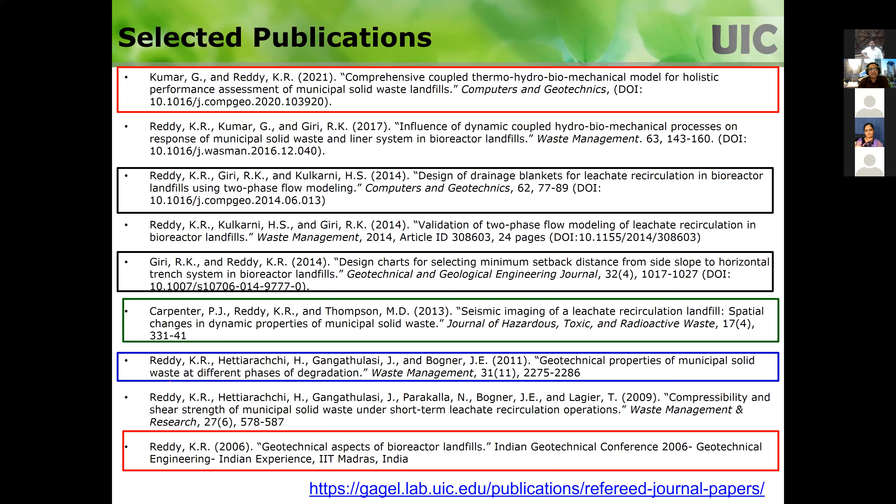This is a very complicated situation because as you inject the leachate, how it gets distributed affects biodegradation. When biodegradation happens, temperatures change. Temperature affects biodegradation, and biodegradation changes the solids, which affects the mechanical properties of the materials, including hydraulic conductivity, which then changes leachate distribution. So you have thermal, biomechanical, and hydraulic processes, all interlinked.

If you're looking for a challenging research problem, this would be one of those. We did this modeling and were able to predict, in a given bioreactor scenario, what will happen to all the things we're interested in learning.

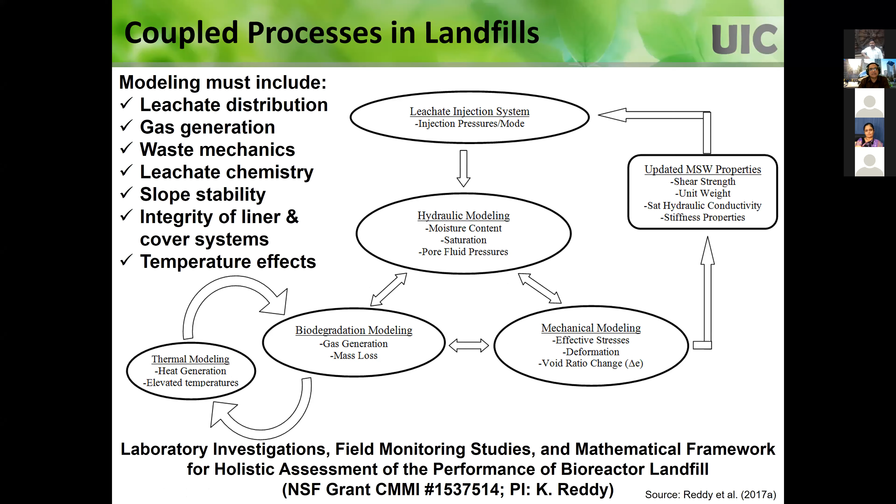But you need to look at gas generation too, so you need an active or passive gas control system. Let's say you want to build a building, but if you don't collect the gases, they're going to appear everywhere, creating stability problems and also health problems.

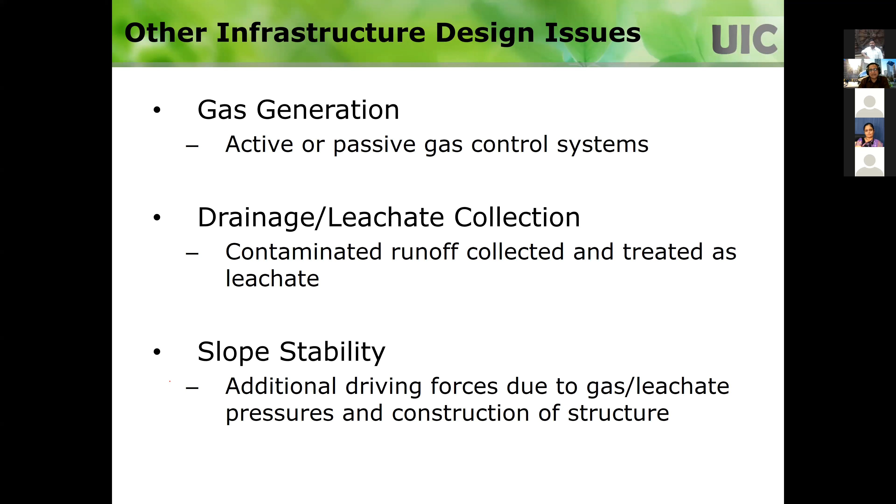Leachate is also an important issue; you need to collect it, and also look at runoff issues and slope stability. You need to consider not only the applied forces but also any gas or leachate pressures generated, so you need to think in a clever manner.

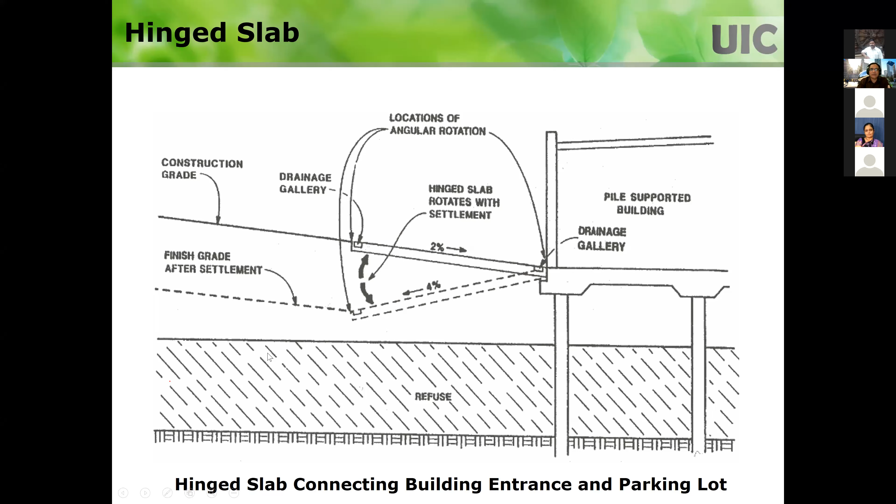So you build it like this, a slope that I'm showing here, like I'm showing on the top. Then when the waste settles, and it will, it finally comes to this configuration. That's what you want. When it rains, you don't want the drainage to go towards the building, you want it to go away from the building. So you need to think about how the settlement is going to take place, and then design that.

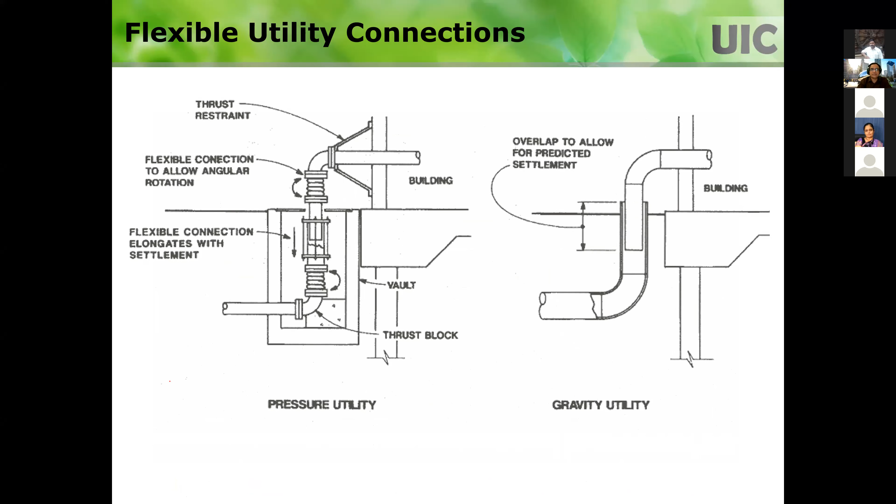Pipes need to have adjustable, flexible connections so that they can elongate and compress. That's important. And the foundations, when you put them in a landfill cover, you need to design based on the fact that you have solid waste below that. And that can be done, it's been done, a grid foundation or mat foundation has been designed. Sometimes you may have to adjust the landfill cover thickness to accommodate this.

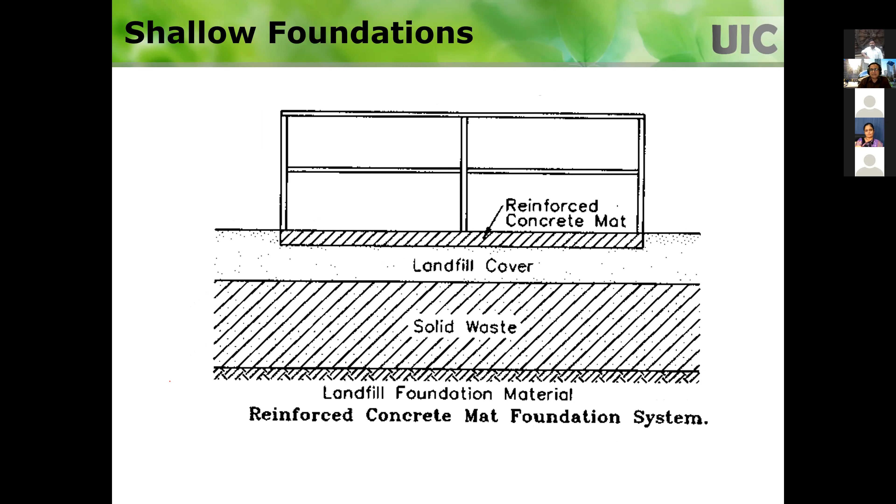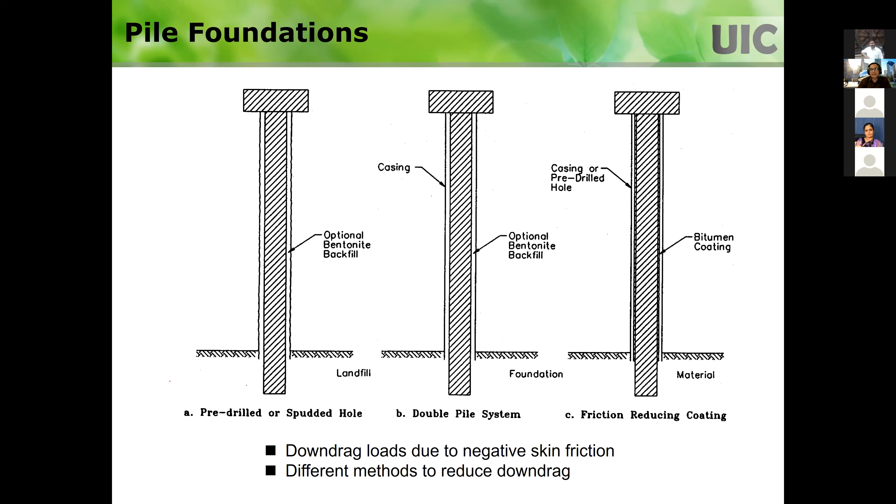And piles have been used extensively in some of the old landfills to support higher loads. But you need to take into account the negative skin friction, downdrag loads, and also figure out how to reduce the down drag, and any environmental compatibility issues you have, you can look at that.

So I've taken up time, just some closing comments. I hope I convinced you that waste dumps must be properly closed out. You cannot keep putting more new waste on that, and these problems are going to persist for a long time. And closed dumps may be used for different purposes.

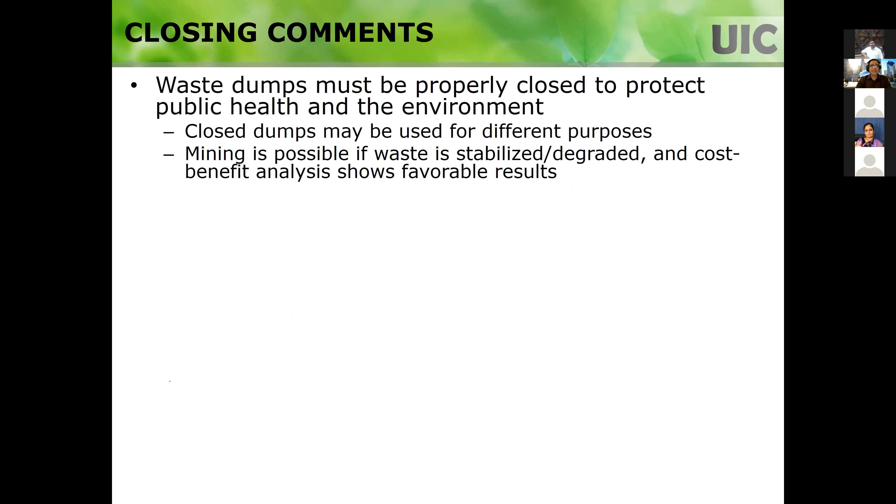Mining is possible if waste is stabilized, and cost-benefit analysis shows it's favorable. Newly generated waste should be managed as per sustainable integrated waste management strategies.

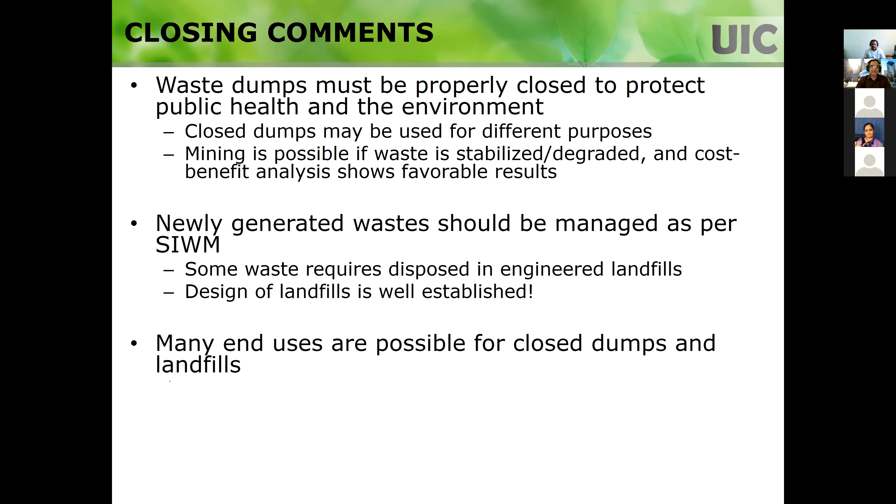And then you need to have engineered landfills as part of that. Design of landfills is well established. We still do research on landfills to make them more efficient and inexpensive, but the standard design procedures are already there. There are many end uses that are possible. So that's the point of my presentation.

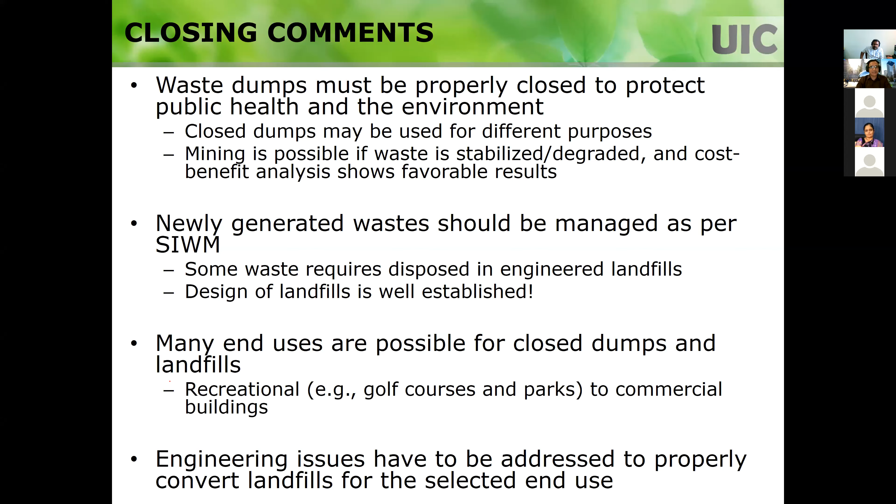These end uses pose a challenge, especially if you are trying to create commercial buildings on these things. In some places, they want to build buildings because those are the primary locations, so even if it costs more, even if it requires constant maintenance, they want to do that. So those are the examples that I mentioned.

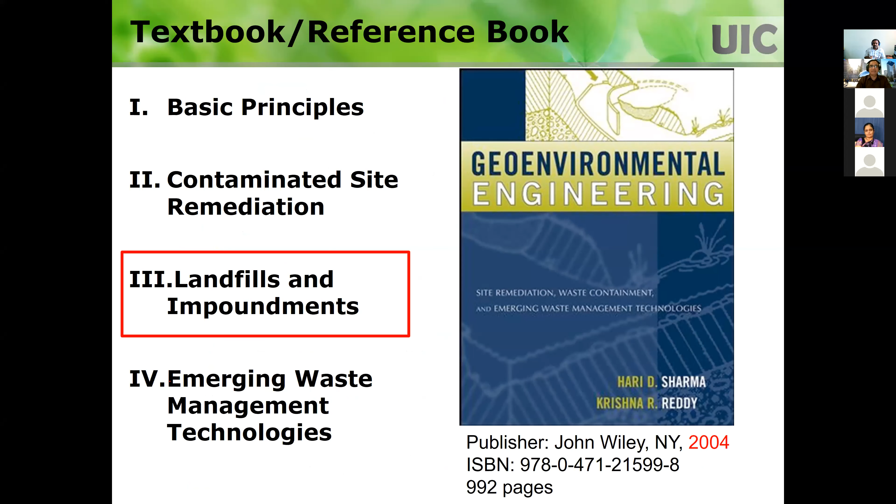So in the end, I want to mention, if you are working on landfills or waste management issues, I highly recommend you have a glimpse of this book and these chapters. I cannot overemphasize the need for this one. This book is written mainly to avoid confusion for first-time learners on how to do these things in a systematic way, each one, how you do it systematically. So you won't be regretting it if you get a chance to look at these things.